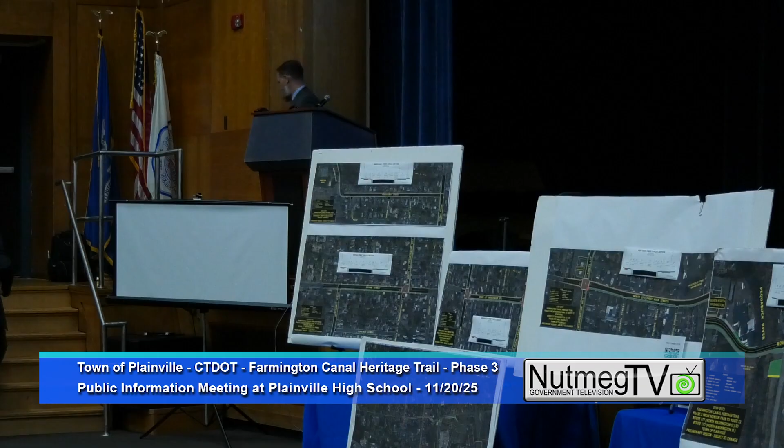Good evening, and thank you, Stephen. Mike Paulus, Town Manager. I want to welcome everyone to this public informational meeting. I think this is an opportunity for everyone to be heard and for you to get some answers to the questions you have, and tonight is the night. This is a process that is still evolving. It is what I like to refer to as an evaluation mode.

So it's important that you leave your comments with DOT. And if, for whatever reason, you don't have that information, reach my office, we'll be happy to assist. But I think this is a trail process that's been long in the making, going back to the COG's involvement to 2018, maybe even prior to that, in the gap closure trail study.

We're now at a point where phase 1 and phase 2 are designed complete, and for simplicity, we're trying to connect 2 points. From phase 1, phase 2, this is it, the alignment. Phase 3 is the most difficult, obviously, because what we have is an active rail, and we don't have that opportunity to use a rail bed. So this makes it very complex.

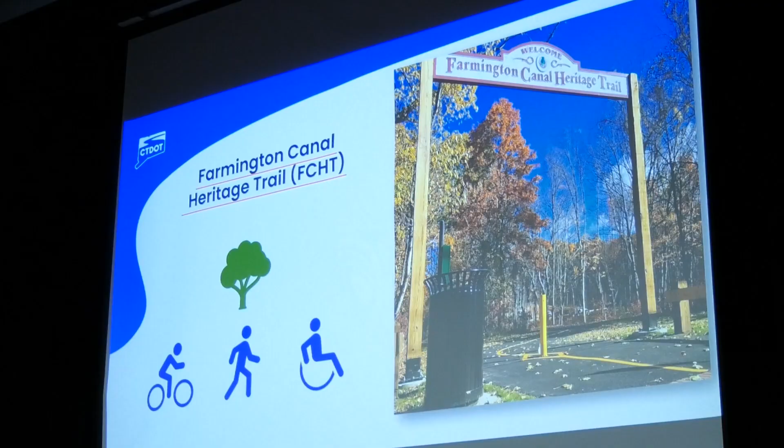So this has been a joint effort, but to go through the DOT team first: Mike Calabrese, the division chief, Scott Bush, the principal engineer. Again, my name is Stephen Hall, the project manager, joined with me is Bill Hogan, the project engineer, and Josh Giorgio, the project designer. We also have some support from landscape design, Matthew Berry. We have Zach Arana, who is our rights-of-way coordinator. And then we have Mark Jewell from VHB, who's been involved in this process for quite some time. And you've seen CRCOG up here before, we've done a lot of work with them as well in developing these alignments. So of course, we're here today to discuss the Farmington Canal Heritage Trail.

Currently there's 86 total miles from New Haven to Northampton, Massachusetts. It connects 11 towns in Connecticut, and the only gap not completed thus far is between Plainville and Farmington. It's also part of the East Coast Greenway, a 3,000-mile trail for walking and biking from Florida all the way to Maine.

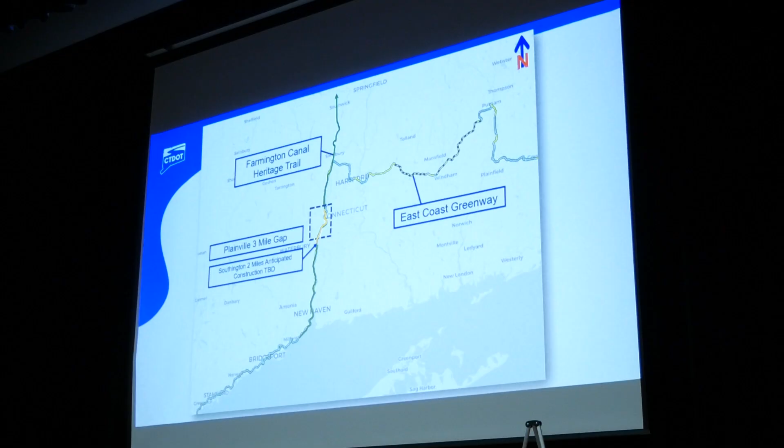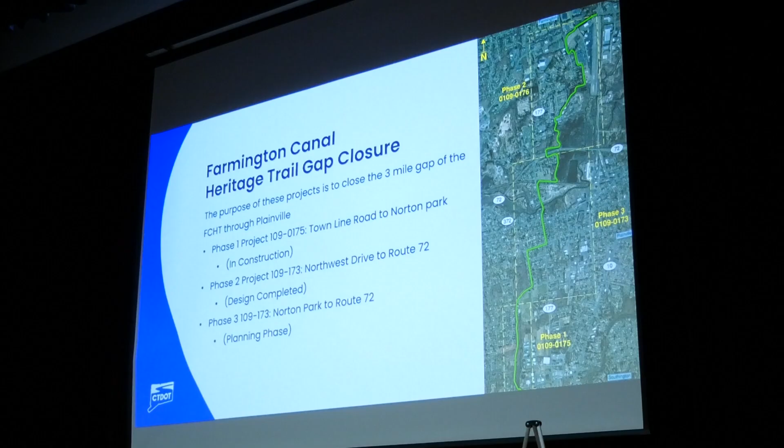The purpose of these projects is to close the remaining 3-mile gap in the Farmington Canal Heritage Trail through Plainville. We have 3 projects up here, as Manager Paulus mentioned. Phase 1 is Town Line Road to Norton Park, which has been awarded to a contractor and construction will begin shortly. Phase 2, Project 109-176, is Northwest Drive to Route 72; design has been completed and it will be put out to bid in the spring for a contractor. Then the discussion tonight is Phase 3, still in the planning phase, trying to connect Norton Park to Route 72.

So I mentioned our coordination with CRCOG. CRCOG did a gap closure study starting in 2016 that involved themselves, the CTDOT, the Town of Plainville, Farmington, and the City of New Britain, as well as the Plainville Greenway Alliance. The goal was to close the last remaining gap in the Farmington Canal Heritage Trail. I show this graphic because it's a summary of all the public outreach done starting in 2016 to try and find an alignment.

One of the reasons this has not been completed is it's a very challenging gap to close. So we had 7 community meetings, 3 newsletters, a project website was created, 12 focus group meetings, 3 community events, 7 steering committee meetings, and 3 presentations to the town council. This is primarily before the DOT got involved.

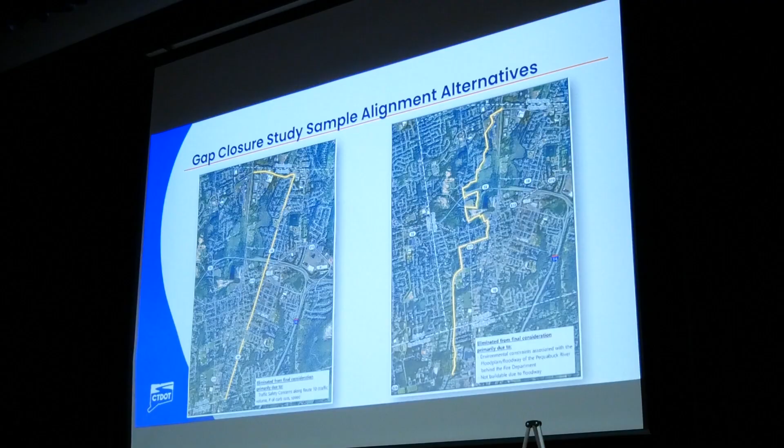So we see these alignments up here from the CRCOG study. After that point, DOT got involved and looked at a few more. Here's just an example of what the study showed, some different alignments, again trying to connect that gap from Farmington through Plainville. All of these can be viewed on the board, and they'll be up on the website as well.

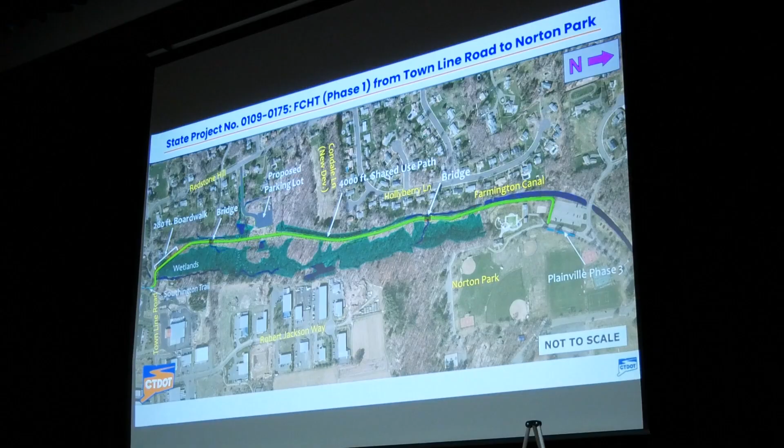A little background, since it's easy to get confused with these projects. 109-175 is Phase 1, from Town Line Road up to Norton Park. It's primarily following the Farmington Canal Heritage Trail—that's the purpose of this, to follow the Farmington Canal. In a lot of locations it's been either maintained or restored, and we can really put the trail right next to it. The downtown location, however, creates a whole other host of challenges.

Construction is going to start in a couple of weeks, on December 18th, 2025. We likely won't see major construction activities until spring. There are some time-of-year restrictions that prevent us from doing some of our wetland mitigation work. So we expect construction to be completed fall of '27, but the trail itself should be completed in the fall of 2026.

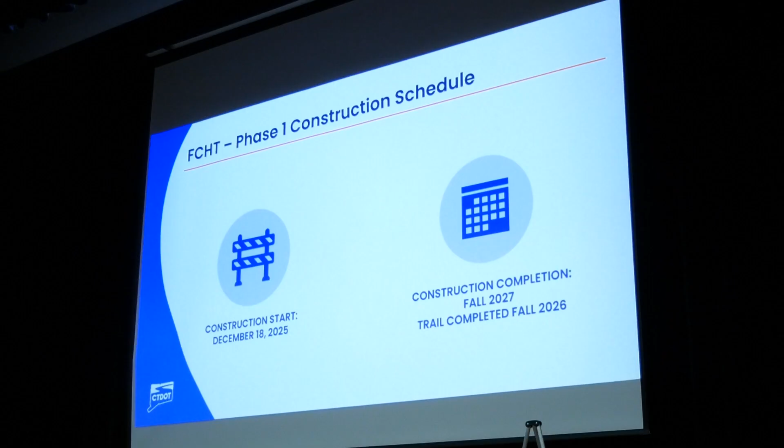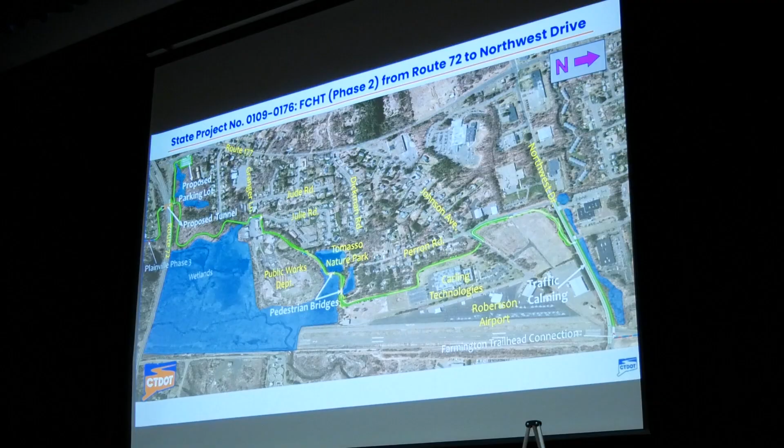We also have Phase 2, further to the north, from Route 72 up to Northwest Drive. It avoids the majority of the wetlands, goes through Tomasso Nature Park, and skirts Carling Technologies. Final design plans are due April 1st, 2026. We essentially have these plans completed and are going through the permit review process now, which is rather lengthy. We anticipate bid opening for contractors July 8th, 2026, with an anticipated construction start date of October 19th, 2026, with a 2-year duration.

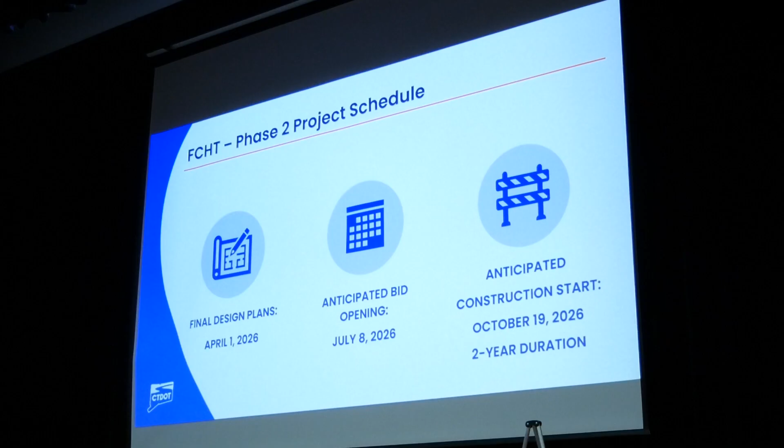So the Phase 3 alignment—we're here today to talk about Phase 3. The purpose and need would be to construct the remaining 1.7 miles of the Farmington Canal Heritage Trail multi-use trail in the Town of Plainville, completing the connection between Phase 1 and Phase 2. The goal is to provide a safe and accessible transportation facility for all non-motorized users—bikes, pedestrians, children and walkers, all types. There's also a goal to provide a spur connection from the Farmington Canal Heritage Trail to downtown Plainville. We're calling that the Spur Trail.

So one of the topics that came up in our discussion at Hemingway is: what are the benefits for the adjacent property owners? Now, the purpose of this project is not to directly provide benefits to adjacent property owners, but there certainly are some. Manager Paul has mentioned community enhancement and economic drive.

In 2019, a research study on 20 papers examined the impacts of multi-use trails on nearby property values. There were some outliers as high as 15%, but generally premiums rose from 3 to 5%. This study took into consideration the proximity of residences to the trail, so if it was adjacent to the trail that was one category, and if it was a half mile away that was a different category. This whole study is up on the website with all the sources as well. That's from Crampton and Nichols in 2019.

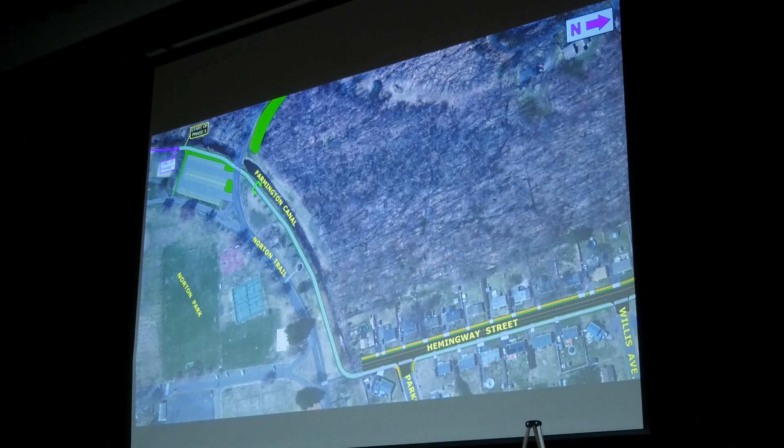Here's the cross section of the trail in Norton Park: a 12-foot trail, 2-foot snow shelf, and then general grading adjacent to the canal and to the park.

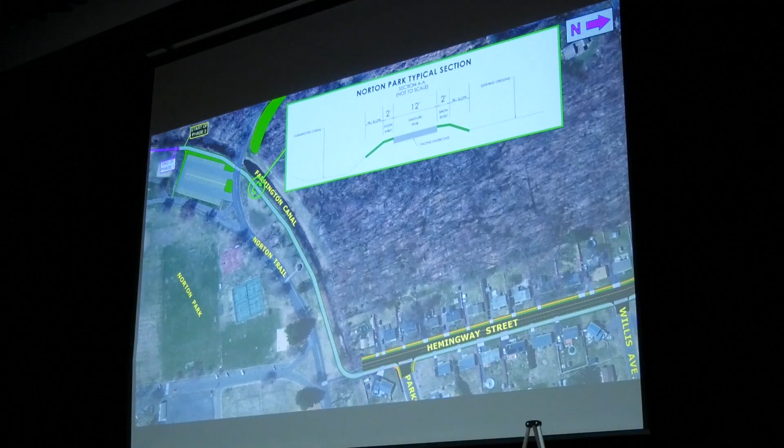Here's Norton Park facing east, heading out towards Route 177. Here's the existing condition, and the Farmington Canal on the left there. And here's a rendering of how that trail will look when it's actually constructed and built along the canal.

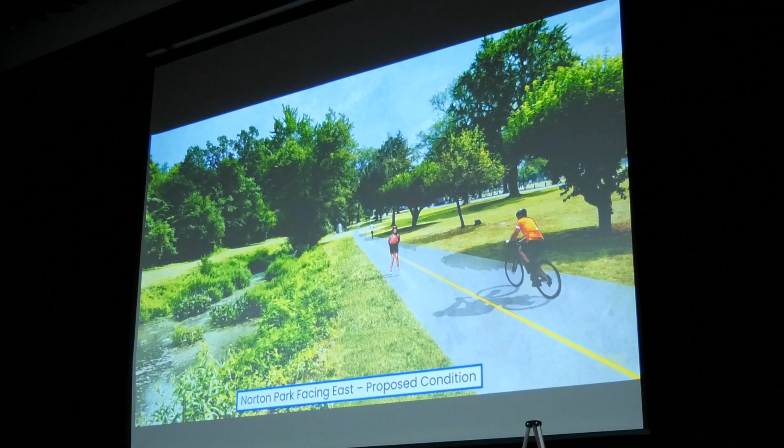Okay, so now we're going to continue north. We just went from Norton Park, and now we're going to jump onto Hemingway Street. The current configuration of Hemingway Street allows for two-way traffic in both directions, and there's available space for on-street parking. Additionally, there are sidewalks on both the east and west side of the roadway.

Here's an overlay of the design itself on Hemingway. The main design intent was to work within the existing sidewalk footprint that's there, so essentially we wanted to make sure our design stayed within the sidewalk-to-sidewalk limits. In order to do that, we needed to reallocate some of the space on Hemingway, including a 9-foot wide trail going up the east side of the roadway.

Here's a roadway cross-section of Hemingway with this trail design: a 9-foot trail along the east side of the roadway, a 3-foot grass buffer, an 8-foot shoulder intended to allow for on-street parking, two 10-foot travel lanes northbound and southbound, a 1-foot shoulder, a 4-foot grass buffer, and then we would rehab or replace the existing sidewalk network that was there.

In order to do this, the existing roadway has to be narrowed. Currently, curb to curb, it's about 34 feet. Under this design, you end up with a curb-to-curb roadway of about 31 feet.

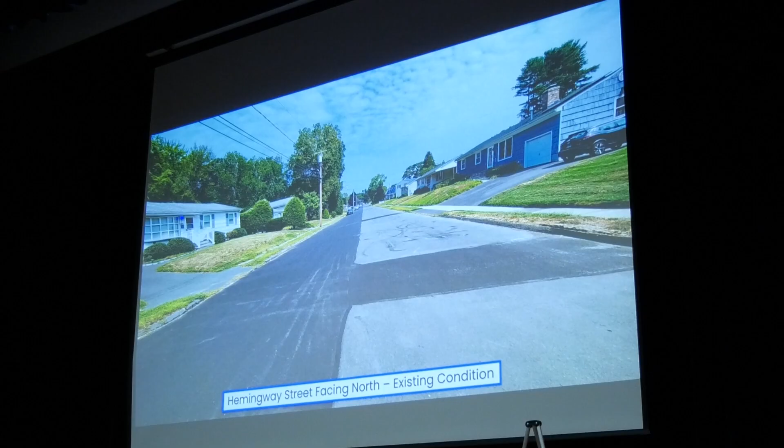And here we are on Hemingway Street, now facing north. This is the existing condition, and here's the proposed rendering of the design on Hemingway Street facing north. So we have our trail on the east side of the roadway here, on-street parking, our two 10-foot lanes, and then the existing sidewalk on the other side of the road.

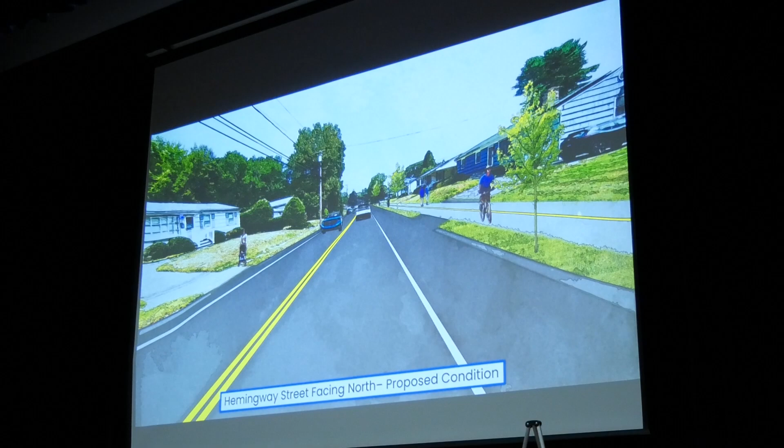Are you going to put those yellow lines down Hemingway? Pavement markings, are you going to put the yellow lines in the middle of Hemingway? We could put pavement markings on Hemingway, but if you don't mind, sir, I'm going to get through all my slides here, and then we're going to come back into the open house forum and discuss, okay? I appreciate it.

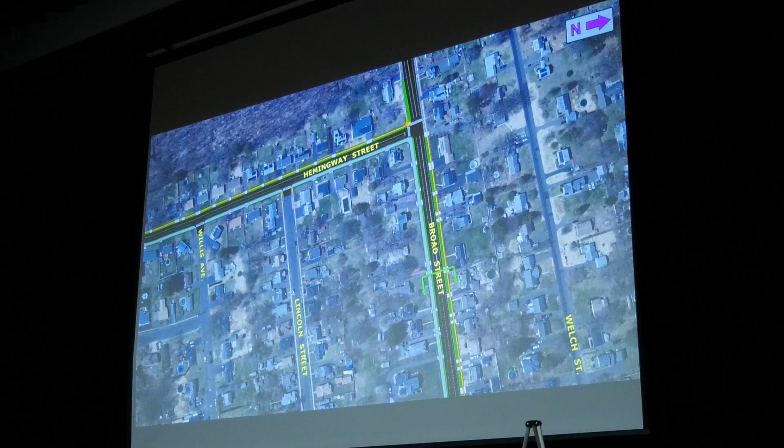Okay, so continuing along Hemingway, the next roadway we're going to be going onto is the south side of Broad Street. This will utilize an 11-foot trail section, 5-foot grass buffer, 11-foot lanes. Basically, we're maintaining the same travel lane configuration on Broad Street as there is today, providing a 9-foot shoulder on the south side available for on-street parking, and then a 5-foot shoulder on the north side, maintaining the existing sidewalk network that's there.

Again, a very similar design concept here where we're looking to work within the existing curb-to-curb limits of the roadway. So the multi-use trail on the south side of the roadway would not extend beyond the current sidewalk limits that are there today.

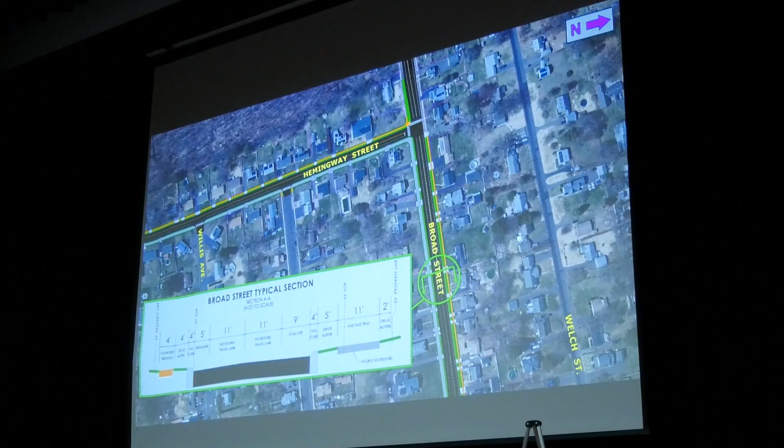So here's Broad Street facing east, existing condition, and here's the rendering of Broad Street facing east, proposed condition. Our 9-foot wide shoulder, 11-foot lanes, and then the existing sidewalk on the north side, and the multi-use trail on the south.

So on this section here, the current roadway width, I believe, is 42 feet. In order to fit the trail in, we have to reallocate some of the space of the roadway and reduce the width of the roadway by about 6 feet.

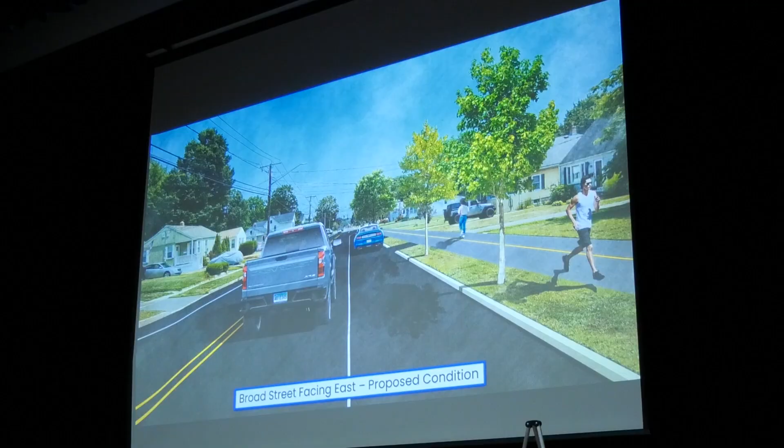Okay, so now continuing along Broad Street, we get to the intersection of Route 177 and Broad Street. This intersection design includes maintaining the existing lane configurations and proposing a raised intersection. At the approaches, at the crosswalks, the intersection would be raised about 3 inches, while the main body of the intersection would remain flat.

The intent of this raised intersection is to calm traffic and reduce speeds. These raised intersections are very effective at reducing speeds, in the realm of 5 to 7 miles per hour. The purpose is to promote safety for all users at the intersection, since we'll have trail users crossing here and here. We want traffic speeds reduced as much as possible, and traffic as calm as feasible at those trail crossings.

As a result of this design, we're seeing some congestion reduction with new signal equipment and optimization of the signal. After construction, in future volumes, we're looking at about a 20 to 30 second intersection delay improvement, so some level of reduced congestion.

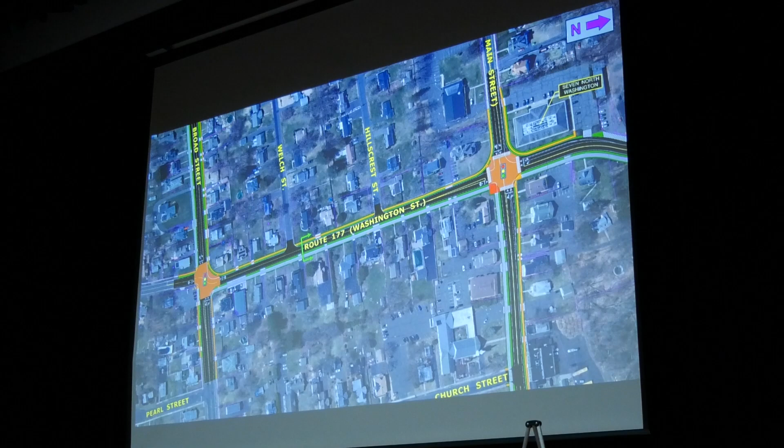Now the trail crosses Broad Street and continues north along the east side of Route 177. Again, a very similar design concept to Broad Street as presented before. The design intent is to hold the back of sidewalk along the east side of the roadway, and identically on the west side as well. To do that, we're seeing about a 6-foot reduction in roadway width, where we'll now have 11-foot lanes and 2-foot shoulders, compared to the current 12-foot lanes and 3 to 4-foot shoulders.

Now we're looking at Route 177. This is the existing condition facing northbound, and here's a rendering of the proposed trail and lane and roadway reallocation facing north. Again, we have our 11-foot multi-use trail, a grass buffer, and then two travel lanes in each direction on Route 177.

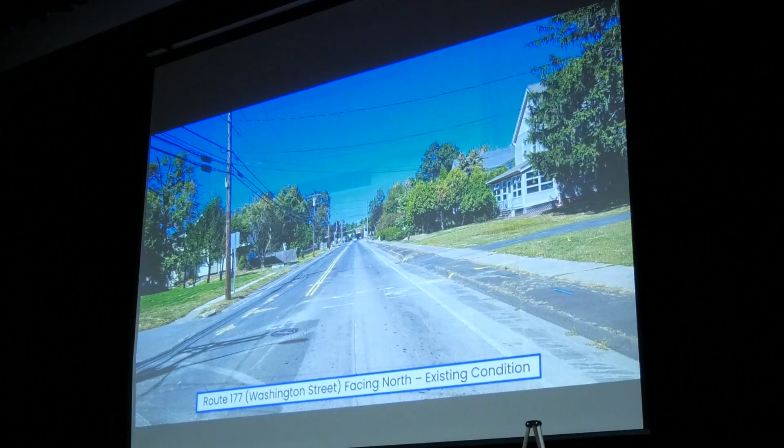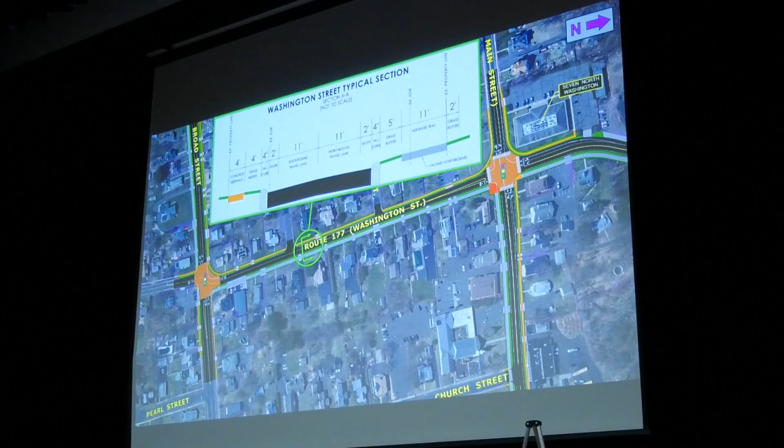I'm just going to jump back a couple of slides. I want to point out that as we continue north, we do have a spur trail that continues east toward the Plainville business area. This is 7 North Washington Street, and here's that business parking lot.

So again, we're continuing north until we reach the project limits at Route 177, on North Washington Street. There are 2 lanes of travel in each direction, and sidewalk is primarily along only the east side of the roadway in this location.

The proposed design has the trail following along the east side of the roadway heading northbound until we reach Bridge 1485. At this bridge structure, we will need to widen the structure about 5 feet, in order to accommodate the existing lanes, 5-foot shoulders, and the multi-use trail section.

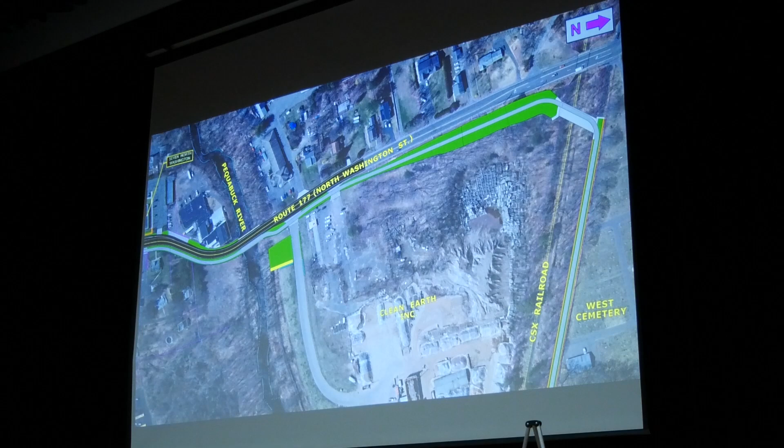The typical section on North Washington Street is very similar to what was shown before -- an 11-foot trail and 2 travel lanes in each direction. On the west side of the roadway there's no existing sidewalk. As we get through this curve, we'll have to slightly modify the alignment of that curvature in order to maintain sight lines through the inside of the roadway. In this area, we're starting to see a little more private property impact on this lot.

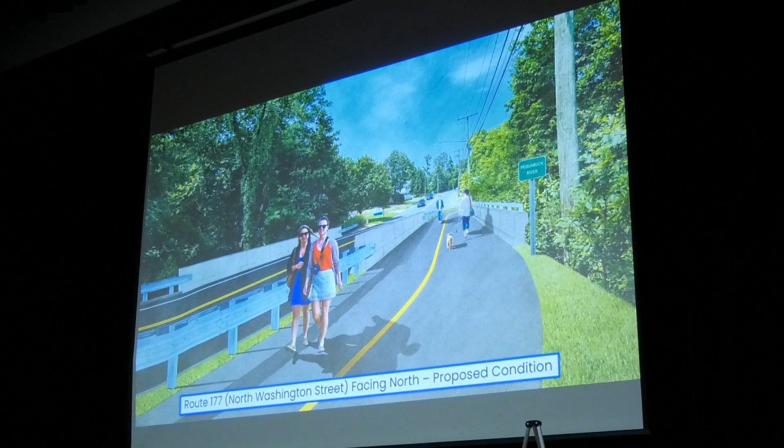Here is Route 177, North Washington Street, facing north, existing condition. And here's a proposed rendering of how the trail will look when constructed, including the bridge widening and the trail going over the bridge.

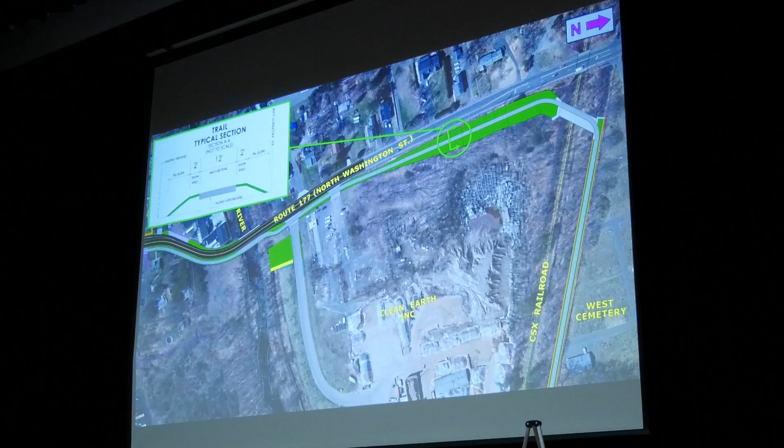Continuing north still, the trail will start to veer off of Route 177 towards the CSX rail line. To do that, we'll need to gradually increase the grade of the trail in order to build a bridge over the CSX rail line. As we start to taper away from Route 177, we'll be looking at a 12-foot trail, 2-foot snow shelves, and grading to establish fill slopes to get us up to our bridge elevation.

So once we get to the CSX rail, we'll be building about a 115-foot span bridge for the pedestrian crossing there, and then building the trail along the existing town access road or maintenance access road. We're pretty constricted at this location by the rail line to our south and the cemetery to our north.

In order to have a gradual trail grade where we connect to our bridge and bring it back down to existing grade, we'll need to build some sections of retaining wall on either side. Along this access road, we're looking at a 12-foot trail with 2-foot snow shelves, and retaining walls on either side.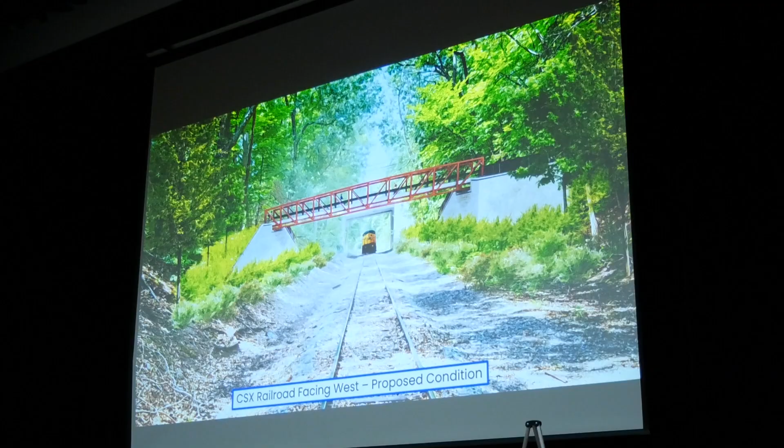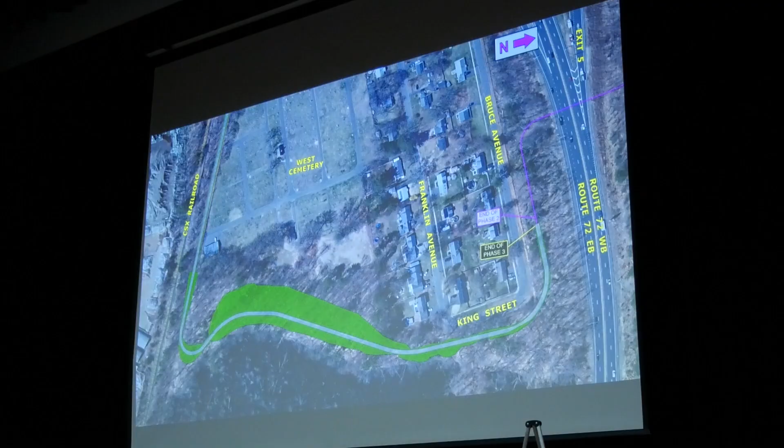Now we're continuing to the east and then heading north. We have existing conditions - West Cemetery here and the CSX Railroad just to the south. Again, the trail continues along that access road and then continues north through the woods until we tie into this section, which is our phase 2 trail alignment.

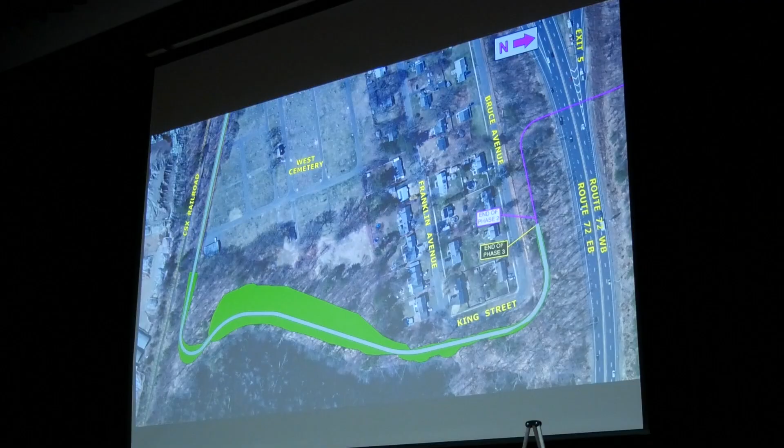Typical cross section for the trail through the woods - again we're looking at that 12-foot trail section, 2-foot shoulders. We have some wetlands here that we'll be avoiding, so we'll have to bench into the existing slope. That's why you see this larger green area that mirrors what we'll need to cut into the woods in order to build that bench for the trail.

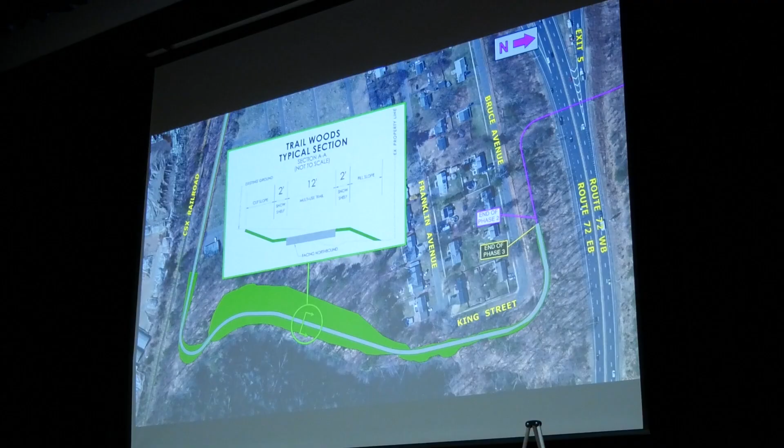All right, so we've gone Farmington Canal Heritage Trail north to south, Norton Park to Route 72. I'm going to bring you guys back down south, to the intersection of Washington Street and West Main Street, the existing intersection here.

So what we're looking to do is build our north-south Farmington Canal Trail connection, but we also want to make sure we're providing connection to the downtown Plainville area. So we're proposing a 10-foot wide spur trail along the south side of the roadway. I'll come back to that.

Here's a cross section of how that would work on West Main Street. It's similar design concepts to the other roadways where we need to reallocate the space of the actual roadway - another 6-foot reduction in the pavement footprint. We're maintaining 11-foot lanes, 4-foot shoulders, 5-foot grass buffer, and our 10-foot spur trail. On the north side of the roadway, we'll be maintaining the existing sidewalk network.

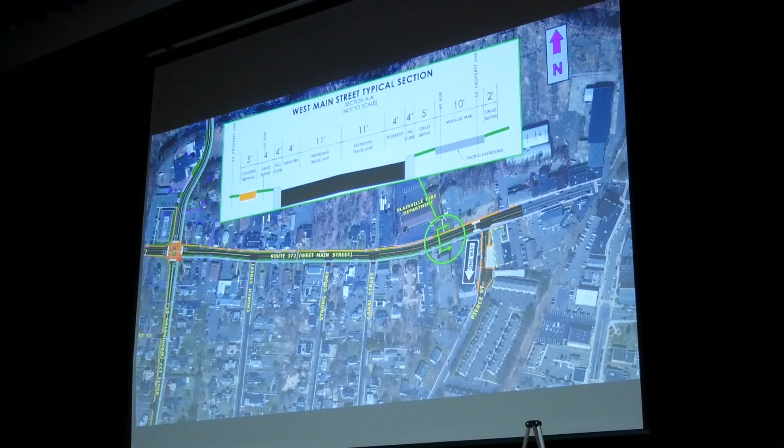Along with this design, the trail itself does start to extend beyond the sidewalk network that's there. We're seeing about 1 to 2 feet of property acquisition beyond the existing sidewalk on Route 372.

Coming back to the intersection, I missed this graphic - one thing we want to do at the corner is provide some kind of indication that there's a connection here. We have our Farmington Canal Heritage Trail going north-south, and our spur trail going east-west, which will also tie into the New Britain Beeline Trail going east-west through Plainville and eventually into New Britain. So we're looking to really promote that connectivity.

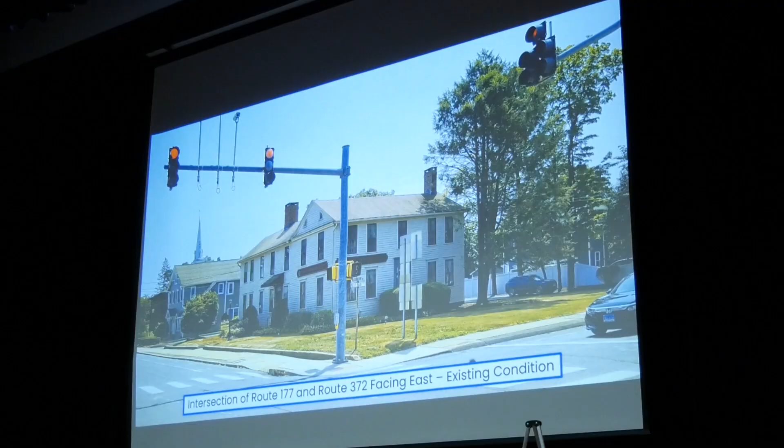One thing we're looking to do at the southeast corner of Route 177 and 372 is build some kind of community corner where we can provide event benches for rest areas or signage to promote the local businesses down the street.

Continuing to the east, our trail terminates just east of Pierce Street. Pierce Street presents a unique challenge with the existing building face being right up against the sidewalk line, so we do have concerns with sight lines here.

To mitigate that safety concern with sight lines, we're looking to convert just the north end of Pierce Street into one-way traffic. The remainder of Pierce Street down in this section would remain two-way traffic, with a cul-de-sac at this location.

Additionally, with that Pierce Street one-way conversion at the north end, we need to consider the fire department here. So we needed to make sure our design accommodated fire truck turning movements to access Pierce Street and head south.

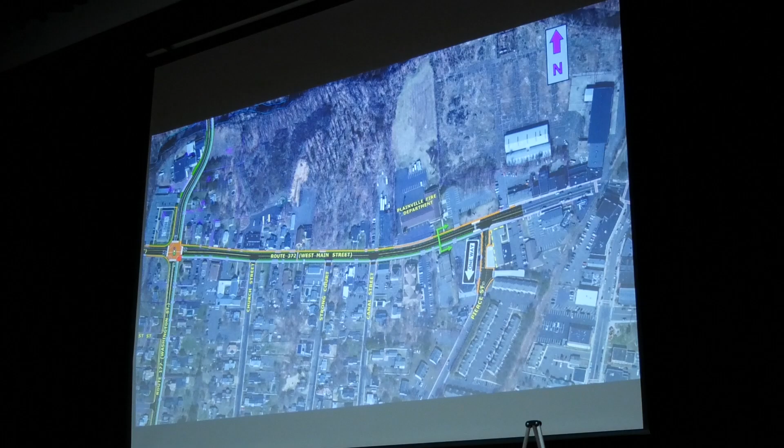Here we are on Route 372 Main Street facing east, existing condition, and here's a rendering of the proposed condition when constructed and built. Again, trail on this side of the roadway, then the roadway with 2 lanes of travel, 4-foot shoulders, and the existing sidewalk network on the north.

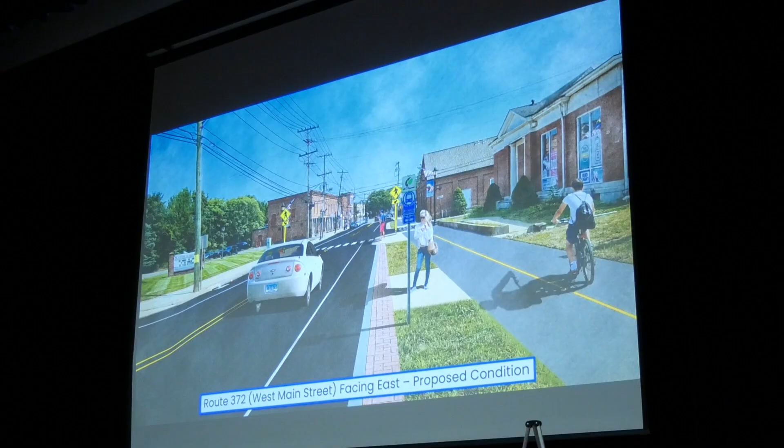Here we're looking at what we're referring to as the Hemingway Woods alignment. The starting point is very similar to what's proposed today with the connection at phase 1. However, we would likely be building a new bridge structure over the canal here, continuing north into the woods. This area is wetland, so we'd likely propose a boardwalk structure through here, approximately 1,000 feet.

Eventually tying out to Broad Street over here in the north, where we would continue to the west and the east. The design would be identical to what's been presented on the poster boards and in the slides earlier.

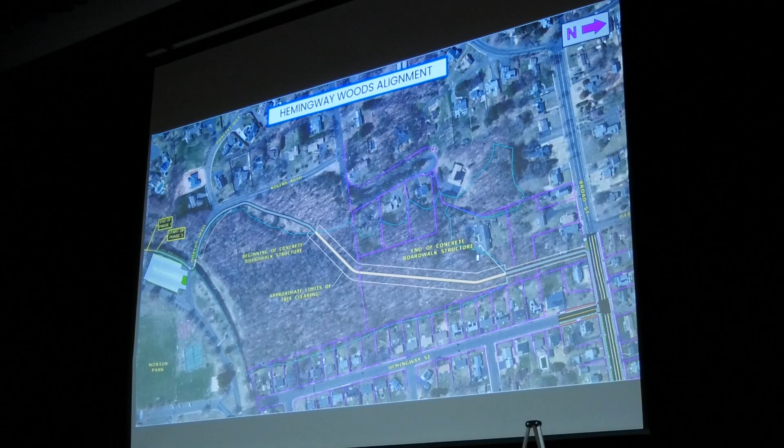Now looking at Route 177, this is the other alignment I wanted to present a color plan on. This alignment proposes the trail coming from Norton Park, traveling east along the existing gravel path along Norton Park Road, then crossing the roadway, with the trail continuing north along the east side of the roadway. This would be similar design to Route 177 to the north.

We'd be looking at an 11-foot trail section here, reducing the width of the roadway and providing 2 11-foot travel lanes and 2-foot shoulders. On the west side of the roadway, we'd be replacing the existing sidewalk that's there.

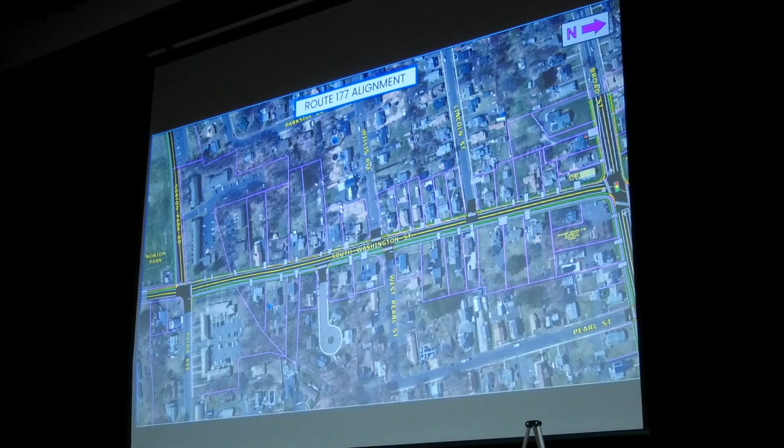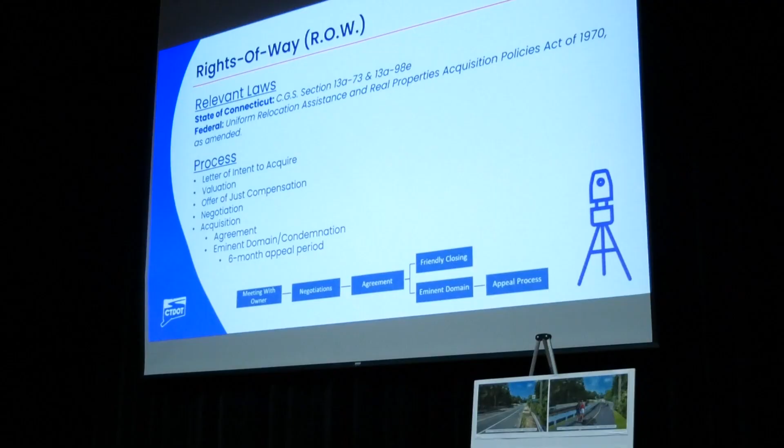That is what I have to present to you today. After our presentation today, we'll continue to have discussions. But right now I'd like to have our right-of-way property agent here, Zach, talk about the right-of-way process.

Thanks, Bill. Again, my name is Zach Carmino, I've met a few of you already. Our office is responsible for acquiring the property rights needed for the project. You heard Bill mention a few of the impacts, but I'd like to give a brief overview of our acquisition process and what you can expect from the state if you're one of those impacted property owners.

All the property rights will be acquired in accordance with Connecticut General Statutes sections 13a-73 and 13a-98e, as well as the Uniform Act. Keep in mind the impacts are still subject to change as the design progresses. If you're one of the impacted property owners, we'll be meeting with you on site.

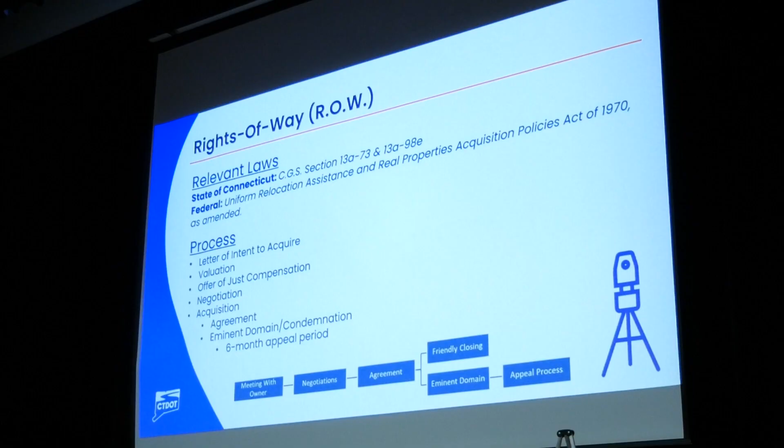We'll be able to explain the project so you don't have to remember everything you heard today, explain what we're proposing to do and the property rights we're proposing to buy. We'll then present the property owner with a monetary offer for those property rights and give them time to consider and enter negotiations.

If we can reach an agreement, the state will handle the closing directly with the property owner and pay them. If we're unable to come to an agreement, the state will acquire the property rights through eminent domain, deposit the original offer amount in the court system, and the property owner would have 6 months from that date to file an appeal if they felt the offer was inadequate.

As Bill mentioned, we're going to be having a forum after the presentation, so if you're one of the impacted property owners, feel free to come talk to me after. With that, I'm going to hand it over to Steve. Thank you.

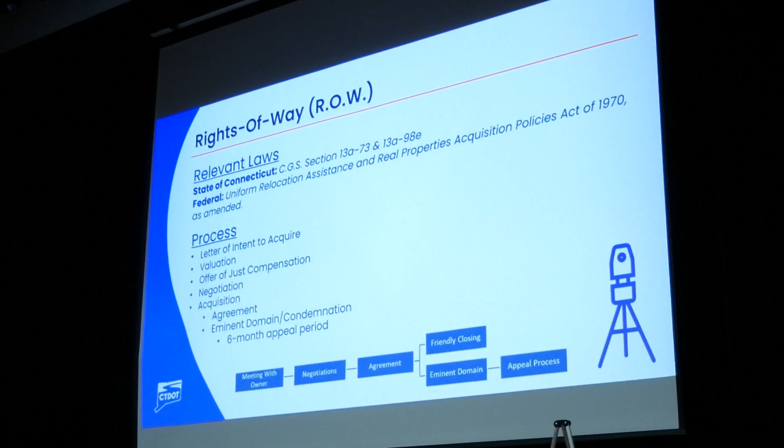All right, so a few more issues to discuss. Some administrative things here.

Section 4(f) of the DOT Act of 1966 involves any use of town-owned land designated as a park. It provides protection for parks, recreation areas, wildlife and waterfowl refuges, and historic sites on the National Register or eligible for the National Register of Historic Places. It applies to all USDOT funded projects, including this one, and privately or publicly owned historic sites of national, state, or local significance.

So the construction of this trail and the alternatives we've seen does use part of Norton Park. In order for this to get through the 4(f) process, we have to coordinate with the town, document what those impacts are, and then that would all be approved by FHWA.

The logic behind this is that there is no one steward of a park or recreational area. It's a community resource, and as such there's no one person necessarily coordinating, but it's a decision that goes to the town and FHWA.